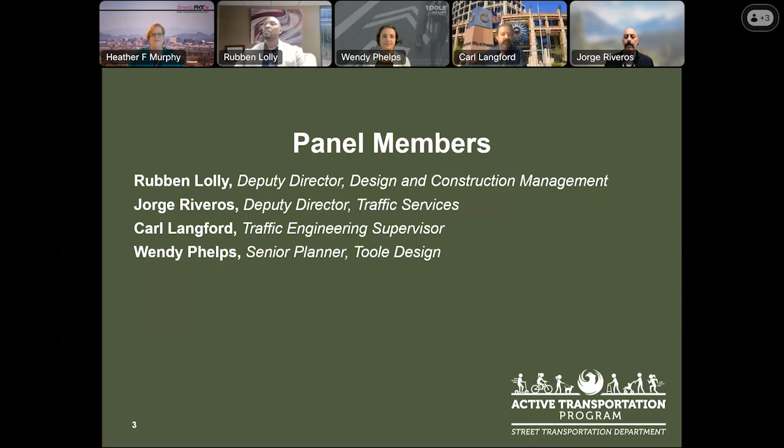Thank you, Wendy. I'd like to give everybody an overview of our agenda tonight. The items marked in yellow are some interactive opportunities that we have to hear from you directly. We're obviously working on the introduction. We'll have a quick audience poll. We'll review the project area and process, provide a summary of public input and recommendations, and we'll put Wendy back on here to give a more detailed overview of the design options. And then we'll get your community perspective and answer questions.

So if you're not familiar with our WebEx interface, we have a little tutorial slide here. The most important thing is this diagonal yellow arrow near the bottom that opens up the little chat box, that's the little bubble in the bottom corner. There will be two opportunities to provide input in the chat or the question and answer section. We will monitor the chat and store that for later, but we will be focusing tonight on the question and answer section. So that's where if you have a question for the project team, please go ahead and put it there. We will be unmuting people toward the end.

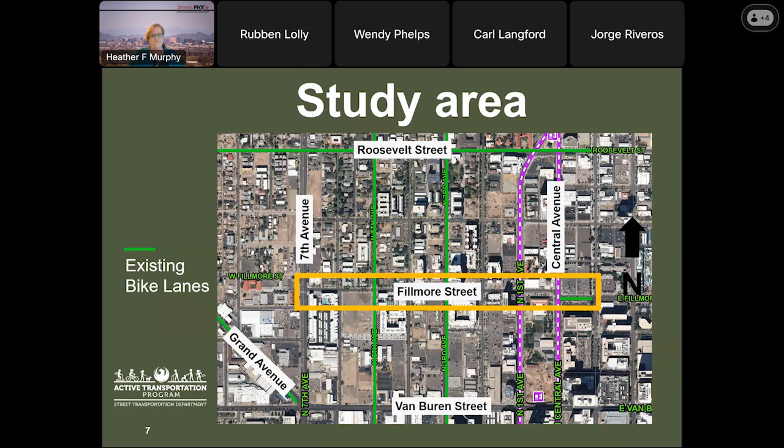On this slide, you will see the yellow box highlighting the study area. This originally was comprised of 7th Avenue to Central, but we saw an opportunity on that gap between Central and First Street to extend the study area, and we were able to do so. The green lines you see here show connectivity to already existing bike lanes. So this project would fill in an important gap in the downtown transportation network for people on foot or on bicycle. And next, I'd like to go ahead and open that first poll and ask you how you relate to the project area.

Our first question here, let's see, it didn't clear out the responses. Let me just deploy this one more time. Okay, team, are you seeing the polling questions? It appears closed on my end, Heather. Okay, let me reshare.

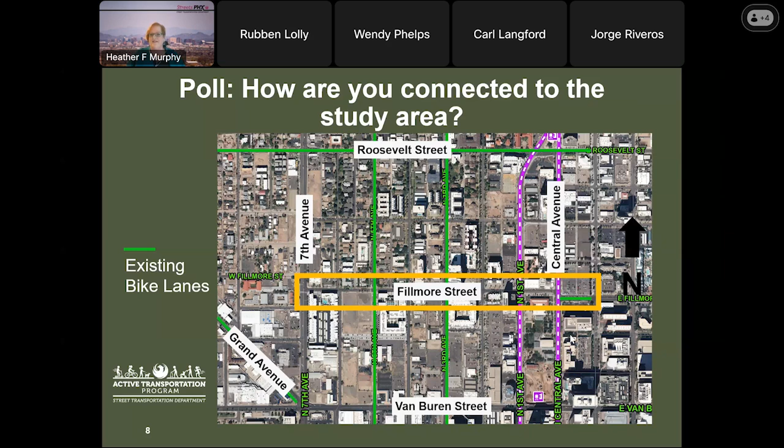We appreciate your input. We're at about 50% of responses so far, and it looks like we are joined tonight by people who live near the project area, who use this street to commute or run errands, a few people who work at a business within the study area, and a couple of no answers. So the majority of you, this mirrors the survey results we'll explore in a minute, but the majority of you do live near the project area and use this street to commute. A couple of people work at or own a business in the area.

So to recap where this fits in the whole process, we're over here on the left side of this slide. We're in the planning and pre-design phase where we're looking at what problems need to be solved, what is possible. And we're presenting tonight concepts that reflect community input. We're not yet into design or construction. So that just gives a little basis for where we are.

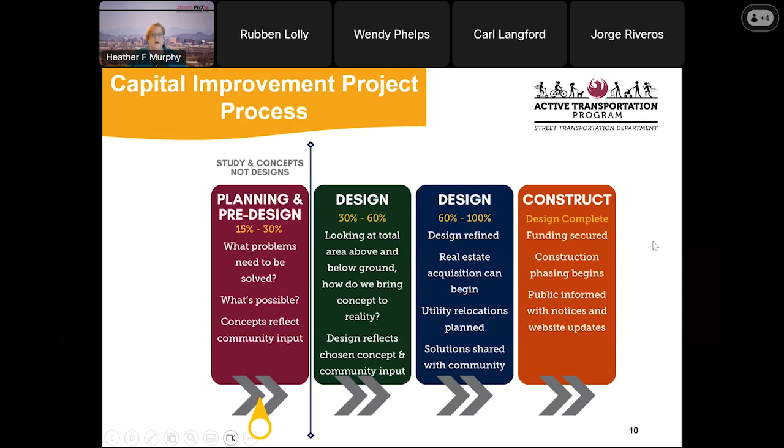How did we get here? This project relates to and ties to a number of studies that have occurred and planning that's occurred for the downtown area as far back as 2010, going through, for example, the Walkable Urban Code, Reinvent Phoenix, the Downtown Transportation Plan update in 2020, and more recently the dedication of the Hans Hughes Memorial Bikeway on Fillmore Street last year. So there are a number of studies that this project relates to.

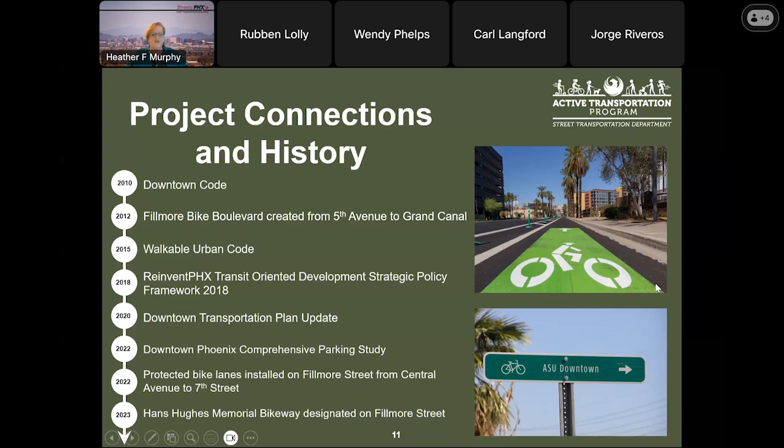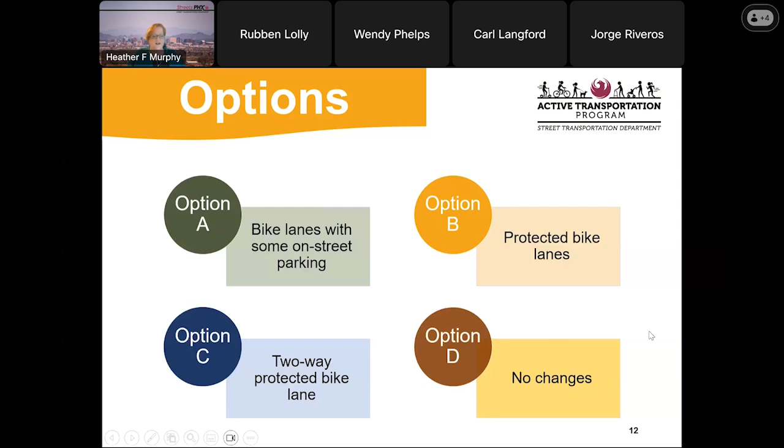And in February we brought you 4 options. The 4 options consisted of bike lanes with some on-street parking, protected bike lanes, a 2-way protected bike lane, and no changes. You'll probably want a little primer on what those actually looked like, so we're going to walk you through that briefly.

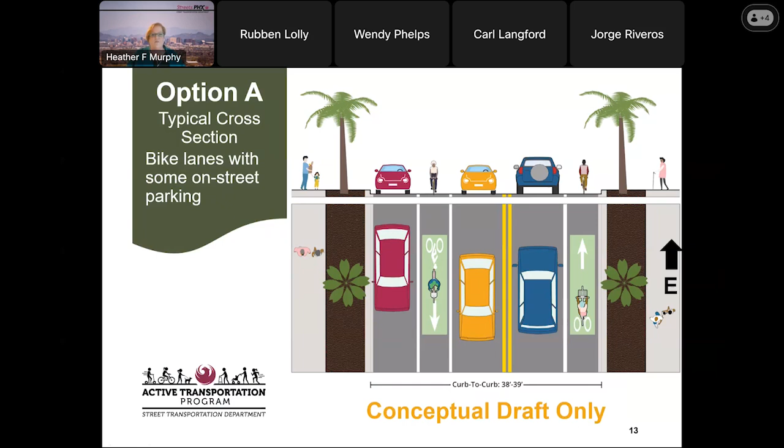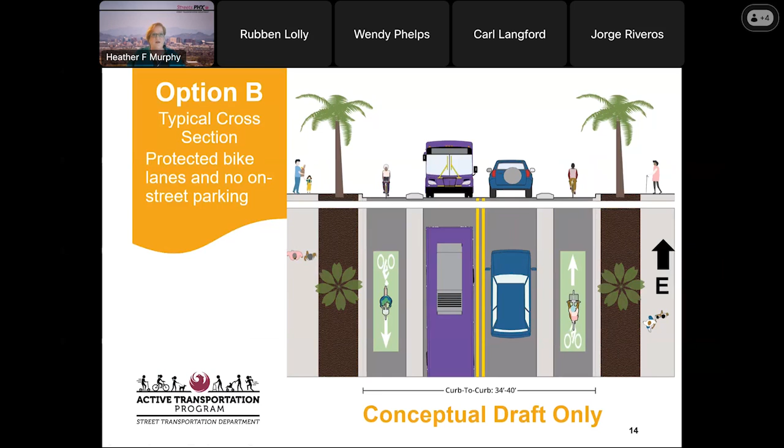Option A is bike lanes with some on-street parking where it could be accommodated, as depicted here on the left side of the slide by the dark red burgundy car. Option B is to have protected bike lanes on both sides with no on-street parking. Option C is a two-way protected bike lane with no on-street parking. And there's always an option D, which is the no-build option.

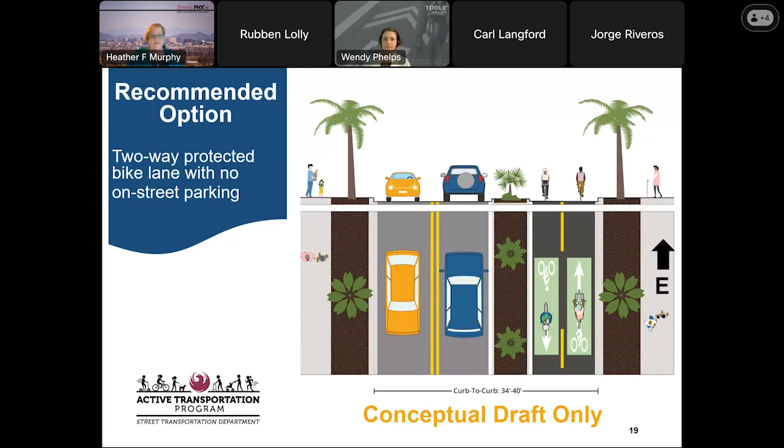We heard several comments asking for a full signal at this intersection, and that was an option we considered in our study. However, that gets complicated because West Fillmore jogs to the north at this intersection, so we'd really have to signalize two intersections. It'd be a very expensive and complicated project, so we wanted to also look at what we could do with the existing infrastructure to improve safety at this intersection.

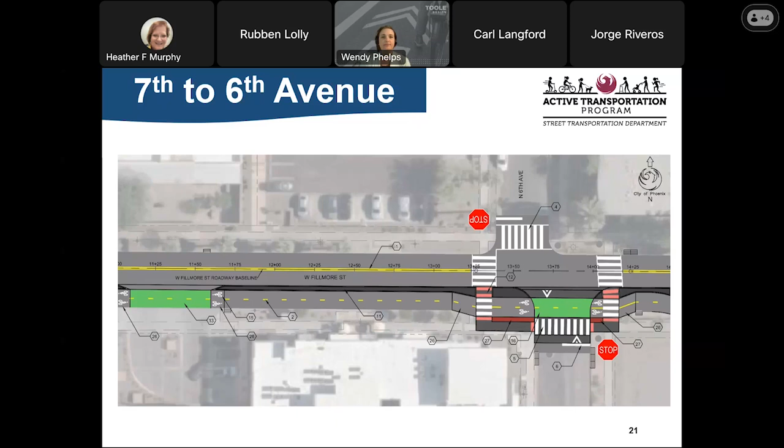Continuing east, we have a similar treatment at the next intersection with the raised crossing continuing. I'd also like to highlight the median areas on the left side of the screen. This design is proposing floating bus islands - and when I say floating, I don't mean above the ground, just that it's separated from the main sidewalk. These are loading and unloading places for bus stops that keep people getting on and off the bus separate from people riding bikes on the bikeway. We have 3 of these along the corridor, and you see the first one in the design here.

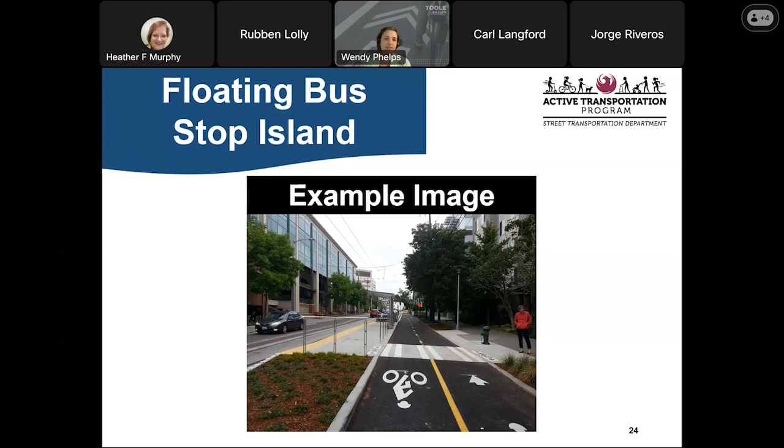One part of this design is that the buses will remain in the travel lane when they stop to load and unload passengers, but with the frequencies of the buses on these corridors, we don't anticipate traffic impacts due to the bus remaining in the travel lane.

The landscaped buffer space will have a break in it, and we'll use rubber traffic stops as the separators in these locations. Eventually, we think these driveways may be closed or not needed anymore, and at that point, the full separation will be provided.

Okay, now we're heading towards the more eastern part of the corridor, and we're getting to some of our larger intersections. We've had this continuous two-way bicycle facility on the south side of the street with the green pavement markings at the driveways and crossings.

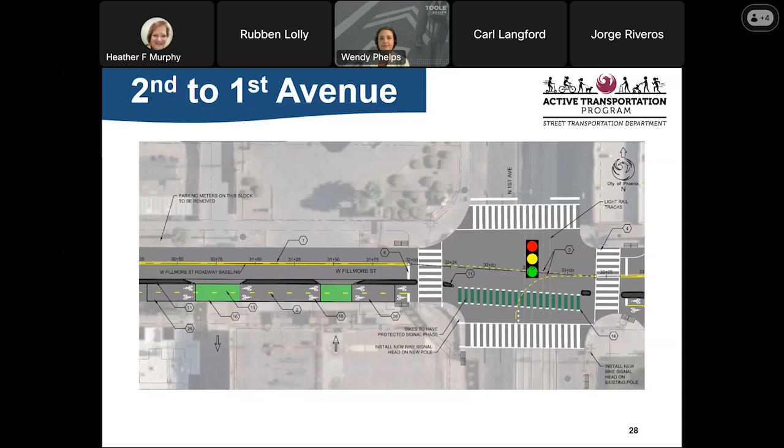We will provide a pedestrian crossing from that space to access the sidewalk.

This proposed design does affect a few of the palm trees on the site, but the Streets Department has been coordinating with the Parks Department, and we don't anticipate any issues there.

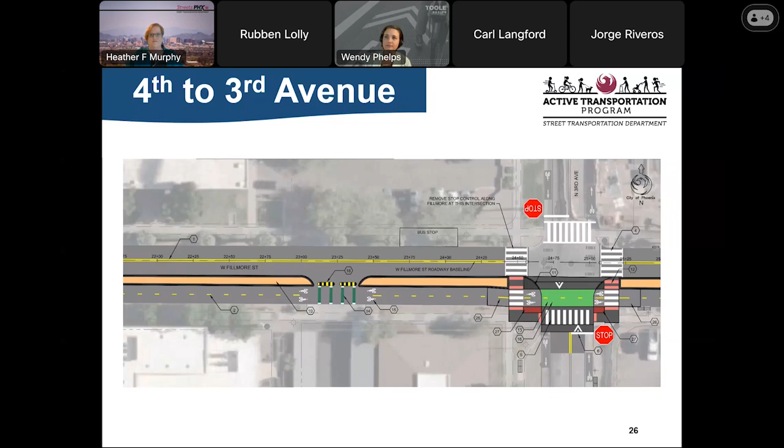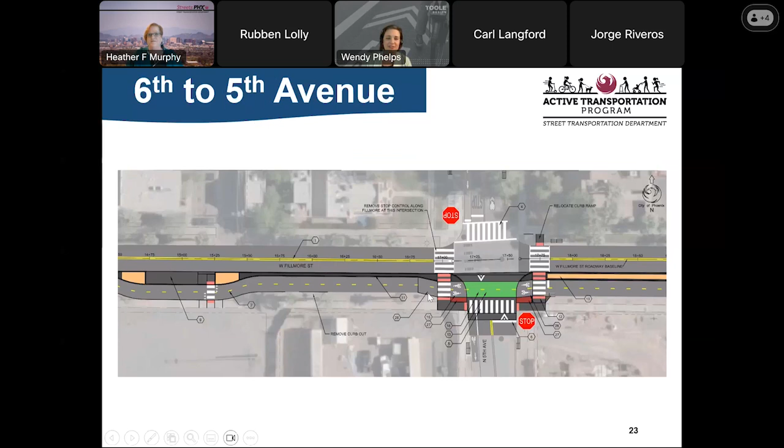Okay, but did I understand that further west of this, the bikeway remains at the sidewalk level even between crossings? Is that correct? I believe so. I think when this is posted online you'll be able to see a little bit easier some of the ramps kind of up and down along the way, they're shown as kind of small black boxes -- thank you for the cursor there -- so you'll be able to see where the elevation might range.

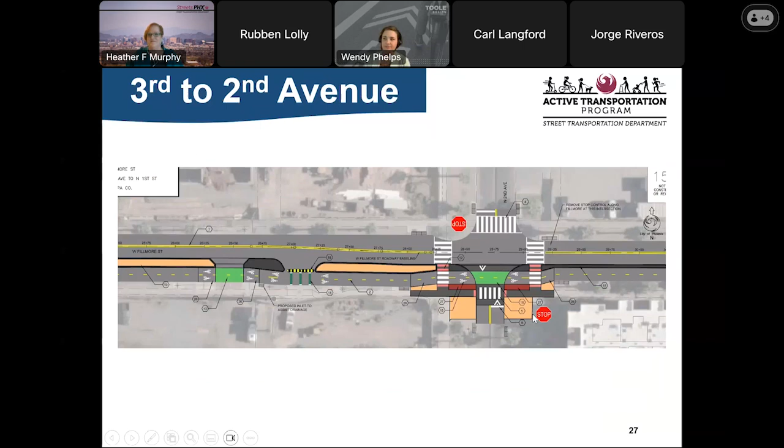And then a final comment/question: one thing that I thought maybe could be further improved is over at 1st Street. For folks on bicycle heading west, you have to cross once, wait for the signal, cross again. I'm probably not patient enough to actually do that, and I'm wondering if it's possible to use a signal like the one at 3rd Avenue and Roosevelt, where on the 3rd Avenue cycle track, if you're going southbound and you get to Roosevelt, you cross over. So I'm wondering if it's possible to use the signal to not make it a double light crossing. Thank you.

Yeah, I'm not sure I fully understand your question. Are you saying you would want to merge and make a left turn more like a vehicle? Yeah, so if you were heading westbound here on a cycle, there would be a special signal where you could cross across the middle of the intersection with one light.

Thanks, Carl. As far as that goes, that would be something to take into consideration under design. If that's an option you'd prefer, definitely let us know in your comments. At the moment in the concept design, it's planned as kind of a quasi-protected intersection, is what we call it. But that's something further design would need to evaluate, whether the timing of that could be accommodated in the signal. Okay, well maybe look at what you've already done on 3rd Avenue, because that's how it's designed there. Thank you.

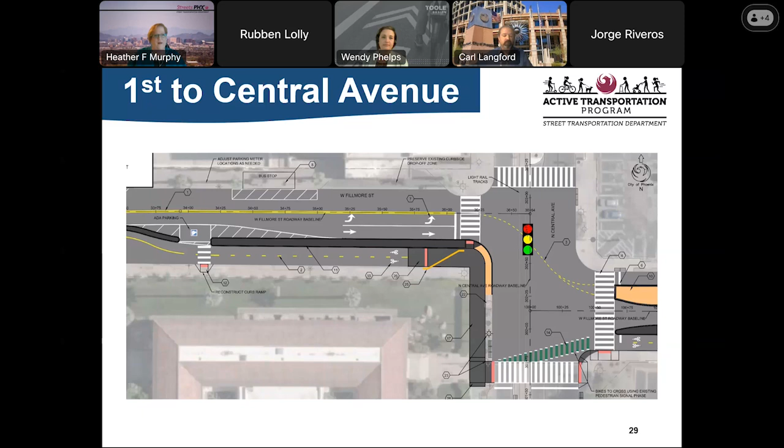And staying with that theme, we had a question asking you to explain a little bit more about the bike lanes switching sides, suggesting that maybe that's confusing and/or dangerous. Yeah, I mean, I think this happens in cities all over the country.

You can get a two-way bicycle facility on parts of the corridor, but not other parts. I think there's an issue a little bit further east here with the number of driveways, which makes it much more challenging to provide a fully separated facility. So this does happen in other places, and certainly the future design will take some of these details into consideration, and I'm sure there'll need to be an educational component as well, teaching people how to cross this intersection safely.

Thank you, Wendy. There was a question if we can look again at the intersection of 7th Avenue. The questioner says currently there's a utility box for the apartment building that results in an overly angular sidewalk, which is tough to navigate on a bike when attempting to get to the HAWK signal. Is that something we would look at in future design phases to make sure it's easy to navigate from the bikeway to the crossing?

Yes, so that's a detail that would be part of future and final design, to make sure we look at what we can do, if there's stuff we could do, and what kind of utilities are actually in the way. But that would be something that would be looked at. Thanks for pointing that out.

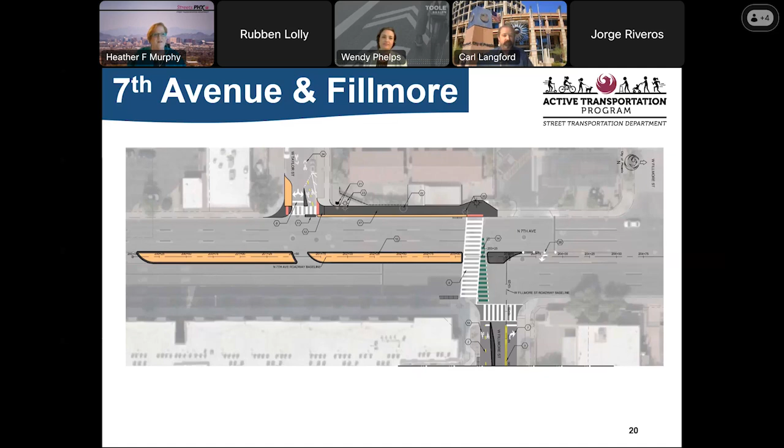Thank you, Carl. Another question that may have been answered earlier was about the intersection of First Street and Fillmore, about whether that could be converted to a scramble or an all-way crossing so that westbound travelers don't have to make the two-stage turn.

I can answer that one. So again, that would be something evaluated in further design. This is really at the conceptual level, and conceptually this is the direction we looked at. There's not enough detail to know for sure, but that's something we can look at in the review and final design.

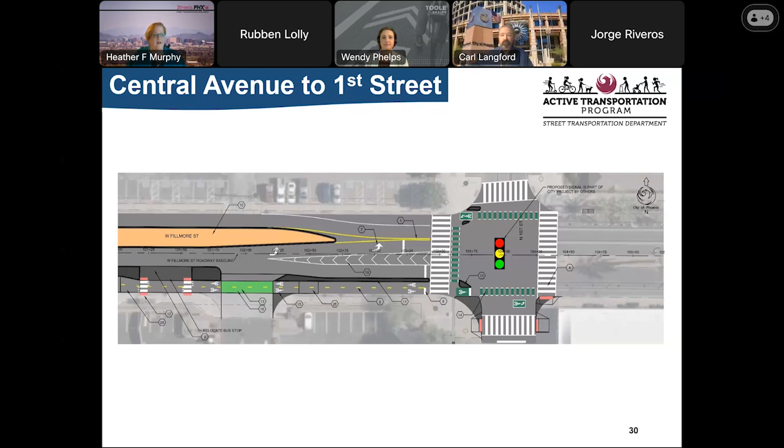As Wendy mentioned, we are seeking to do a quick build at 7th Avenue, possibly as soon as 2025, to address the concerns that this community and the people here tonight brought to our attention regarding crossing 7th Avenue. Rubben, do you have any final remarks?